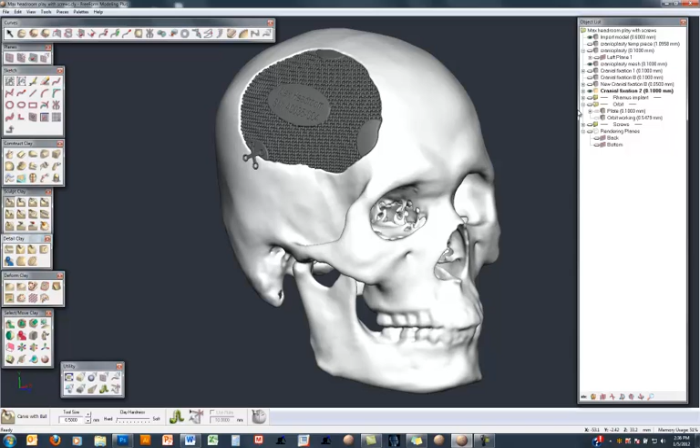I wanted to point out two changes we've made to existing functionality. The first change we've made is to piece reposition. So if I take this model we have on the screen, I'll hide the skull and zoom in up around the plate and the bracket.

Most people are completely used to, when we're zooming and panning in freeform, especially with very heavy models, we'll drop down into this sparse mode, and as soon as we let go of the G key or the H key, the model will redraw itself in full detail. Now with piece reposition, the way it used to work is as soon as we were moving a piece around, it would keep itself in fully shaded mode all the time, and for very heavy pieces often you would get a very jagged motion, you wouldn't have a very smooth motion.

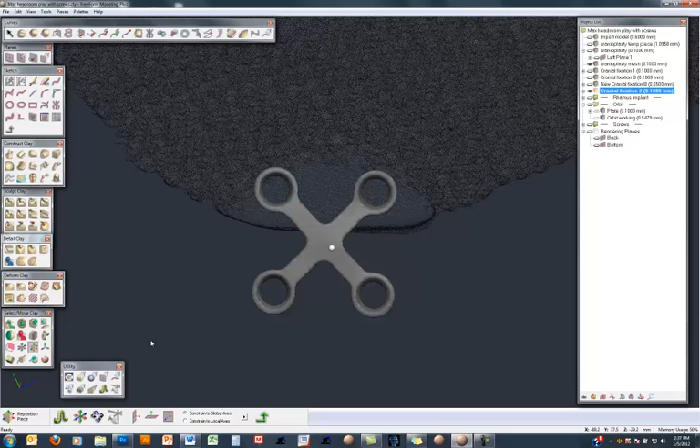Well, we've done a change now that it will automatically drop itself down into sparse mode when doing these gross movements in piece reposition, and if you hold the shift key to go to precise movement, it'll maintain a fully shaded mode for complete accuracy.

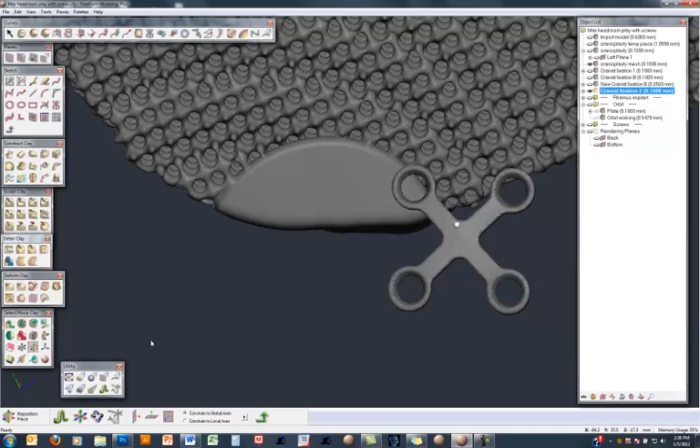Now it may take a couple of seconds to dump the whole model into the graphics card memory, so if I try moving this one again, you see that the first few seconds it can be fairly jagged, and then once the graphics card memory has fully absorbed the model, all of a sudden everything speeds up and it becomes a lot more interactive. So that's just one thing to be aware of. That's one of the changes.

Another change we've made is in how the model rotates when using the arrow keys on the keyboard. What we have on the screen right now are two of these diamond shaped brackets with 4 screws in the top bracket, and down here we're showing the global coordinate system.

For this top bracket, which is currently active, if I show where the local coordinate system is, you can see that it's right in the middle of that piece. Now if I bring up the options, under setup we have some new options here for view rotation center: global origin, active piece origin, or the bounding box center of all visible objects.

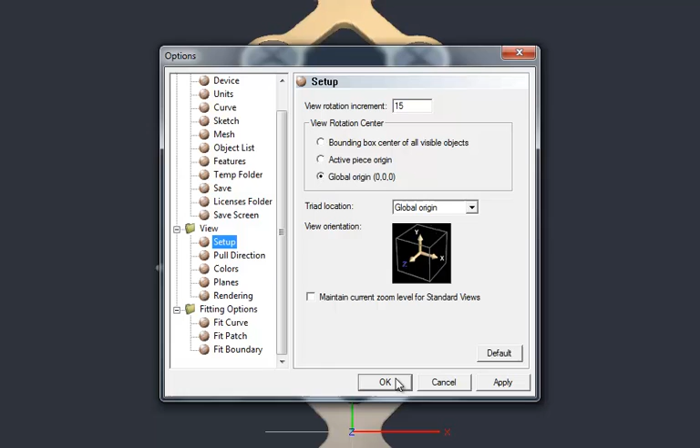Right now we're set to global origin. So when I use the arrow keys, and right now my arrow keys are set to 15 degrees, as I rotate, you can see it's rotating around the center of the global origin.

If I move that to the active piece origin, and this piece at the top, the piece origin is pretty much right in the middle, so now you can see it's rotating around the active piece origin. And if I zoom in, it still rotates nicely around the active piece origin.

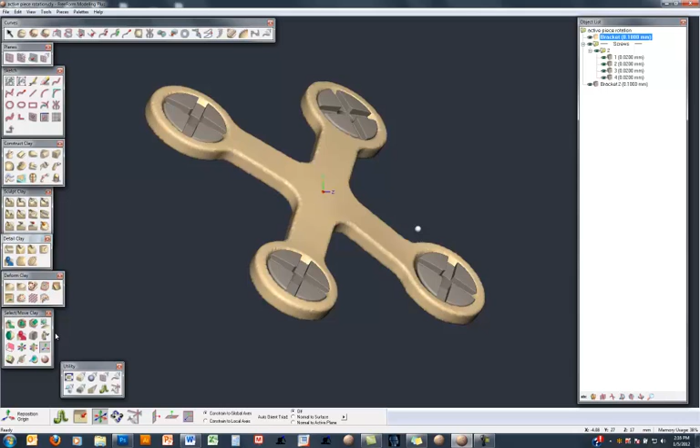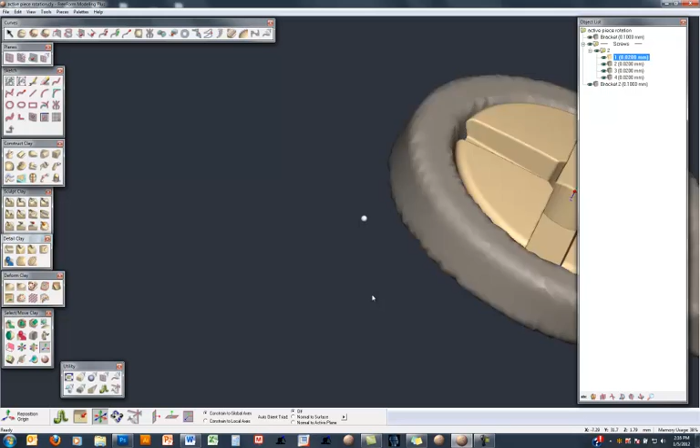If I went back to rotating around the global origin, and now use the arrow keys, you can see how we have a different behavior. And if I activate one of these screws and really zoom in, right now we're still set around the global origin, and hit rotate, you can see how it rotates off the screen.

Whereas if I put it back to active piece origin and now do my rotation, everything stays nicely on the screen.

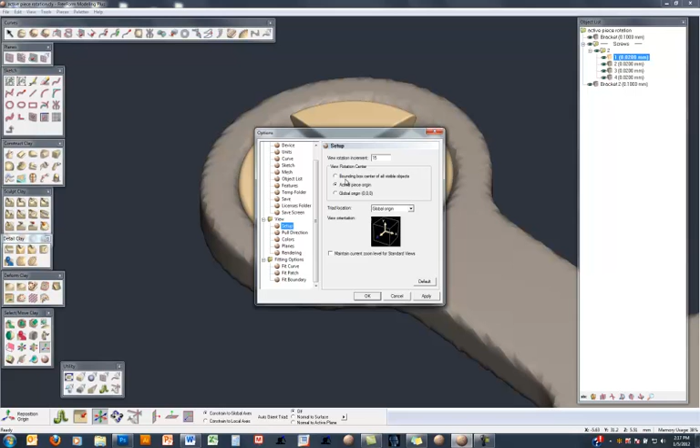And then we also have the option to go to the bounding box center of all visible objects. So if we activate that and see how it behaves, again it rotates off the screen. So we have those 3 new options. Choose which one is best suited to the situation you're at, and you should be much happier with how your model is rotating on the screen, especially when zoomed in like this.